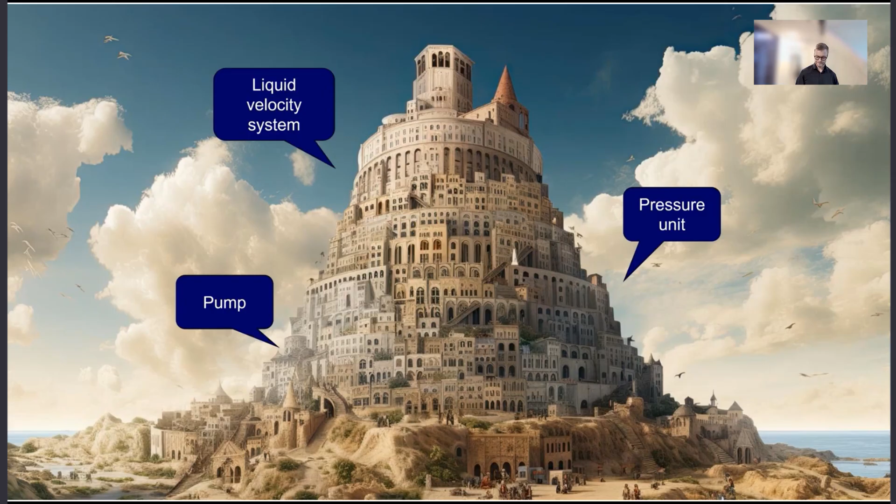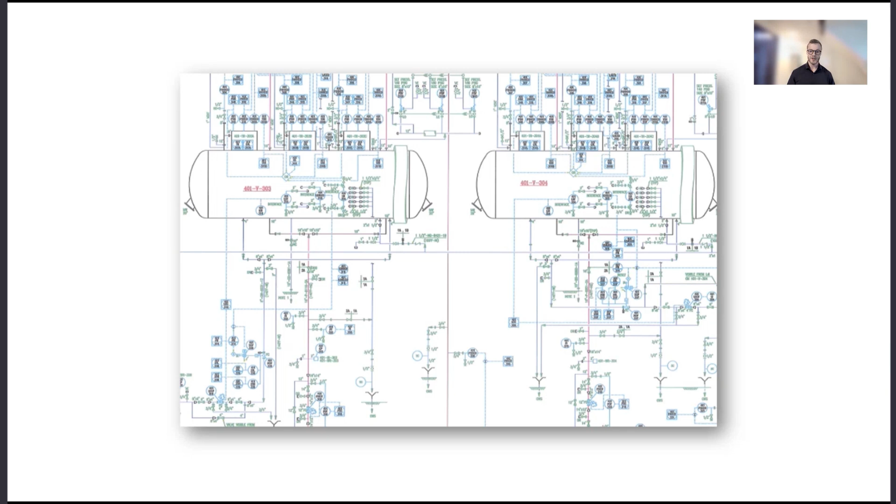This is what most systems look like. This isn't a design fair, it's real life. It's a maze of components, cables, sensors, pumps, valves, software modules, each with its own name, its own format, its own story. And when it breaks, you're left navigating this maze blindfolded. You spend hours trying to figure out what it is, where it came from, and who touched it last.

And this isn't actually the whole story. This is just the tip of the iceberg, so to speak. This is just one representation in our design, just one viewpoint. We know multiple people with multiple goals track the same items through multiple systems, each serving multiple functions, each with its own format, its own logic, its own language.

And when you need to make a decision fast, you're stuck stitching together fragments from 5 different platforms. Decisions made on half the story ends in surprises. It's not just a mess, it's actually dangerous.

That's why it's our mission here to create this common language. A common language the same way as they have it in the music industry, a way to communicate seamlessly between engineers.

AI models are only as good as the data they are fed. So if you feed them messy data, they will spit out messy data as well. Manual mapping is also something that we have seen, but it's slow, it's expensive, and it's error-prone. Vendor lock-in kills flexibility and innovation. So none of these really solve the root of the problem.

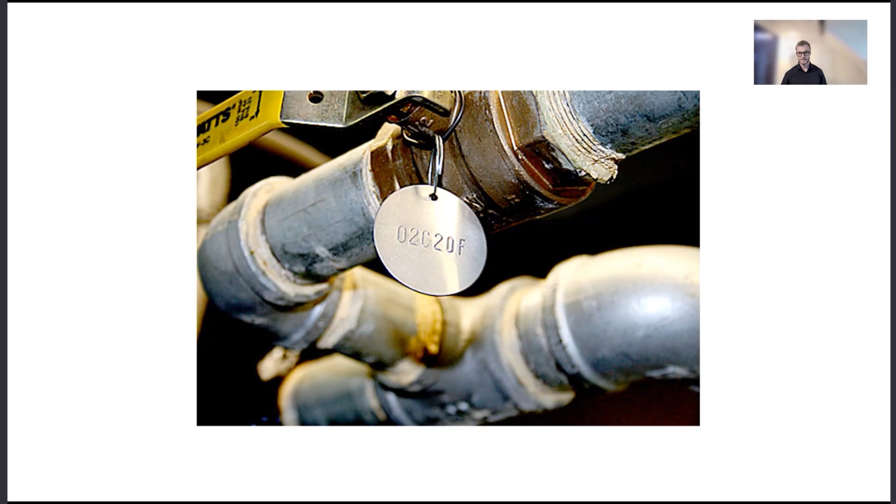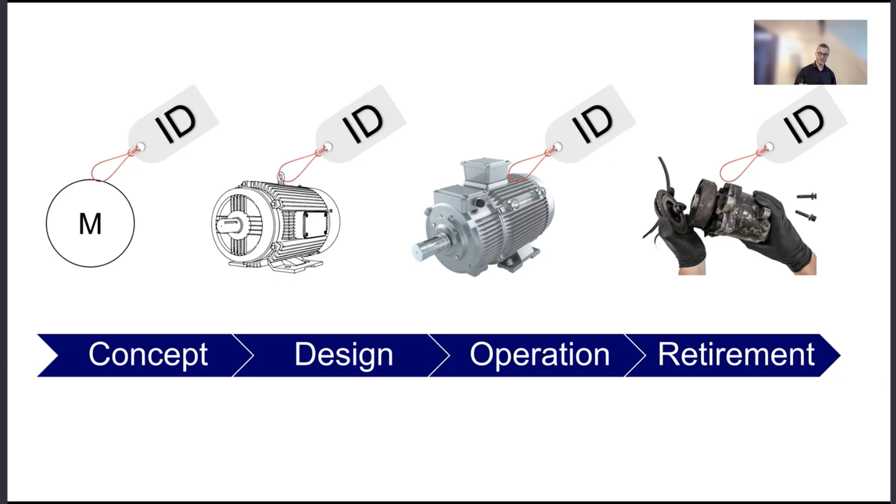Reference designations today take you from the concept all the way to retirement, from design to operation. We have made it our mission to create one tag, one truth, zero guesswork, one thread across the entire life cycle. You can actually say that reference designations for us are like the Esperanto of engineering. They let mechanical speak to electrical, software talk to hardware. They let humans talk to machines.

But how do we do it? But how do we know which tagging systems then to use? There are actually quite a few of them out there.

Pretty much all legacy systems are either hard to learn, very complex, or impossible to scale and make work for big data. If we try to arrange the possible solutions out there for reference designation systems by how hard they are to learn and how hard they are to scale for big complex data, taking some of the usual suspects, it turns out that they're pretty much either hard to learn, and also pretty hard to scale for big amounts of data.

But if we now try to see what we have done with 81346, we made it our mission to make something here which is both very easy to learn and very easy to scale.

So how does this work? In our group, we have stuck to some core principles. We want to keep a simple syntax that can handle unlimited complexity. We have made it our mission to introduce a proper classification framework with definitions, and we have also allowed multiple structures and viewpoints. Making something complicated is easy, but making something easy to approach, that is hard.

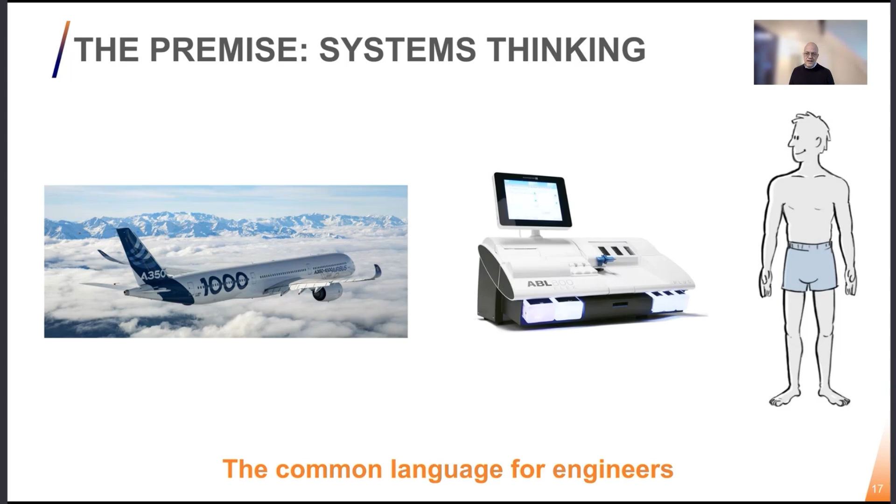Just for your own surprise, human beings are also considered to be systems. In fact, you can look them up - we officially have 11 systems. For example, we have a muscular system, skeletal system, cardiovascular system, nervous system, etc. I don't know if it's available in Finland, but at least in Denmark, when I go to the doctor, I'm pretty sure he has a skeletal system and a muscular system hanging on the wall. So I suspect when I get sick, he's not interested in me, but he's inspecting one of my systems.

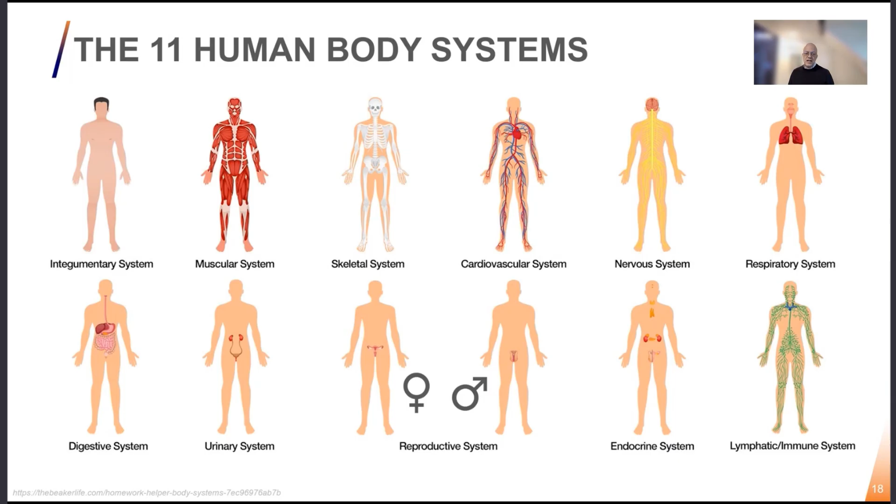Just think about it. A human being is extremely complicated and complex, and a way of organizing that complexity is to organize it into systems, as you see in front of you. So the premise for understanding systems, and understanding 81346, and understanding anything you do in your daily life, is considered to be a system.

When we have done so and accepted the fact that everything is a system—that's a belief we need to take—then we would like to model it. I need to spend a little time introducing what a model is about.

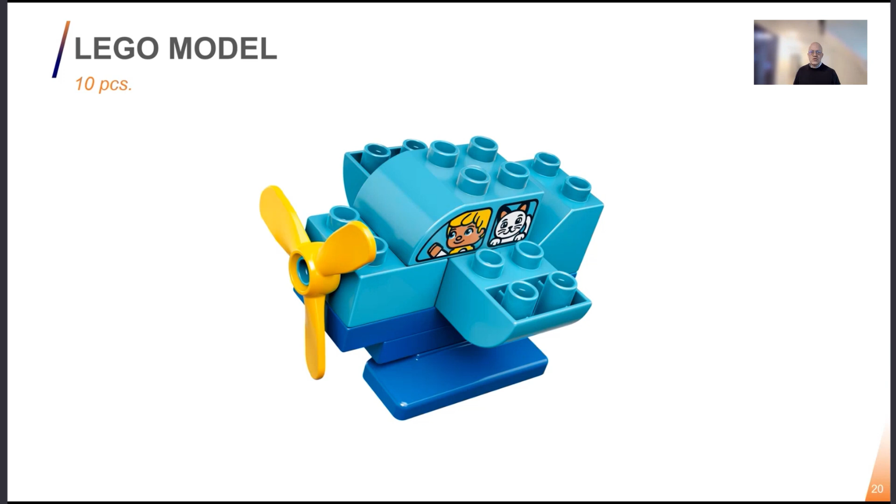So allow me to take something very simple, namely a Lego model. If I want to model an aircraft, I've used Lego Duplo and 10 pieces of Lego Duplo bricks to create a model of an aircraft. Yes, I know it's a baby model, yes I know it's simple, but no one can question that this is a model. So models are extremely useful.

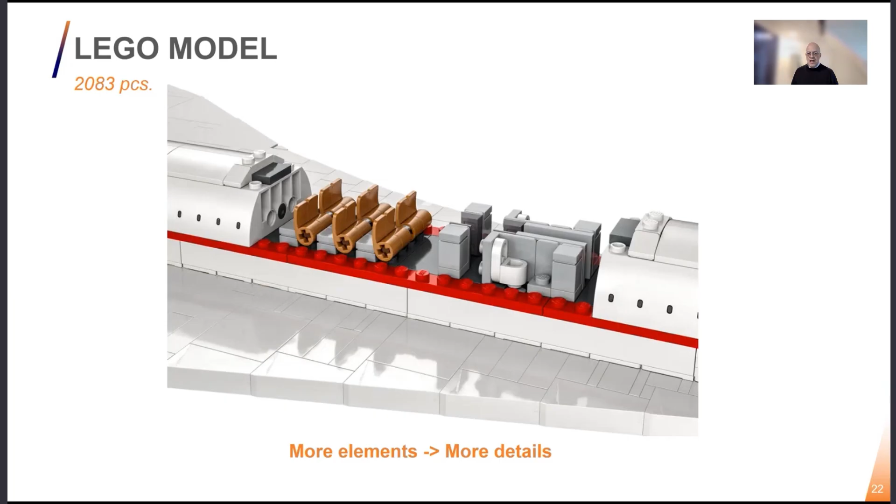And of course, if I want to model something more sophisticated, like the big Concorde, you can actually buy that as a Lego model toolkit. In this case you have 2,083 pieces—at least that's what's written on the box when I bought it. When you assemble it you get a nice piece of model like this one. It actually gets so detailed you can model seats and toilets inside. It's still a model, but it has the commonality that the more elements you add, the more details you get. I would like to repeat that when we talk about system modeling.

So if we combine modeling with system thinking, then we would like to introduce what 81346 is in fact about, namely creating a reference model.

And just to make sure we are not talking about something you don't know what is, I have made a little definition for you here. In the context of this presentation, a reference model is an informative representation of an object, person, or system for reference purposes. Now the little word 'reference' is something you have to remember, because we need to get back to it in a moment. That little word reference is the big difference of what 81346 actually offers you. So please remember the little word reference from now on.

So if we combine system thinking with reference and with model, what do we get then? Well first of all, the same rule applies: the more elements we get, the more details we can get, just like the big Lego thing.

Then we need a syntax. Philip mentioned it in his presentation before, but we need a syntax so we can point at somewhere in the model and know what we are talking about. And finally, of course, the model is not made with Lego bricks, but it's made with system bricks. And these system bricks are defined by the IEC 81346 standard.

That's the first secret we would like to share with you, also to the many new beginners: when you open 81346 and look into the definitions and terms, we use the word 'system' everywhere we can get away with it. System, system, system. We repeat it constantly, and we think about systems every day here in our company.

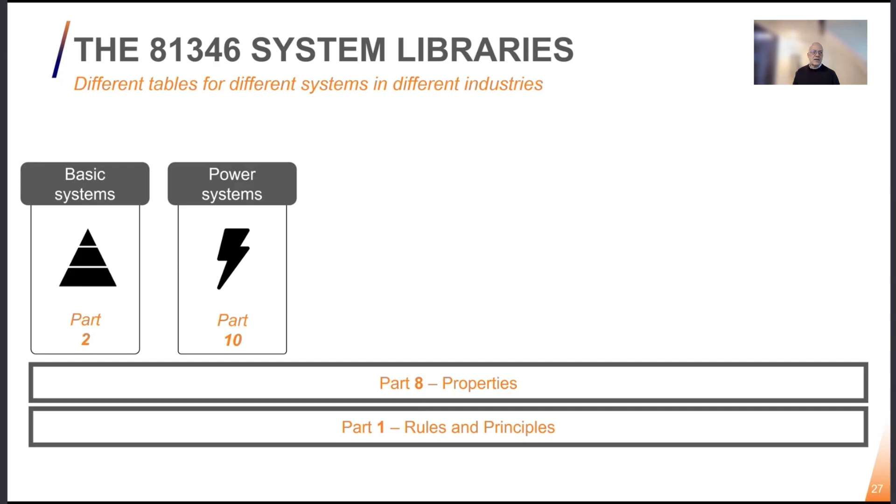Then we have a nice range of industry parts. We have Part 10, which is anything related to power systems, any kind of energy you want to produce, whether it's wind turbines, nuclear power, coal, or solar—same, it's all handled by Part 10. And we see a lot of energy companies transferring towards Part 10 nowadays.

Part 12 is about construction systems, when you build a house, and the latest news is we're going to expand it to be infrastructure as well, which means roads and tunnels and stuff like that.

Part 14 is about manufacturing systems, machinery that produces something, whether they produce milk or pack milk, or they produce cinnamon rolls, same story, or even produce aircraft. We use Part 14 for that.

The new Part 20 is about vehicle systems. It originates from the job we have done together with Airbus for a range of years now, but we have expanded the idea, so we don't talk about systems in an aircraft, but we talk about systems of vehicles, which means it fits for ships, it fits for cars and trucks, but also for aircrafts and helicopters and stuff like that.

And then we have a new boy in town, so to speak. We have something called system processes, which means when you perform a process, if you want to describe how to build a road, or if you want to perform or describe how to make a process of shifting a filter or mounting something, we have created a new Part 50, which is about the processes that you can organize as well.

So as you can see in front of you, the standard is growing, but the way that it's growing is that when you know how one part works, if you know how Part 2 works and Part 1 works together, when you get the idea, you can easily unlock the rest of them, just depending on what you want to do. And in daily life, we usually only work with Part 1, 2, and then we work, of course, with Part 8 in the sideline.

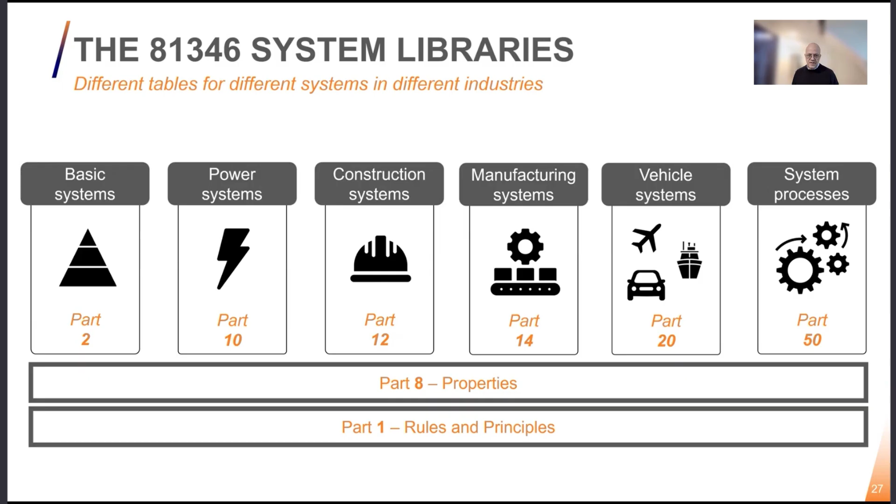Now, just to fly you in without getting too detailed about 81346, how it works. So in a nutshell, when we are asked by new beginners like half of you, how does it actually work? Well, first of all, the way to sort things that are complicated is that you need to break them down.

So you have a system which is organized in subsystems and subsystems and subsystems so on, which is what this little figure represents. And finally, we also have the triangle. The triangle is a ready-made repository of systems you can pick from. And that means it's just like a box of Lego, to be honest. You open the box of Lego, and there you've got all the elements you can build from, and then you simply just model it by making a system breakdown.

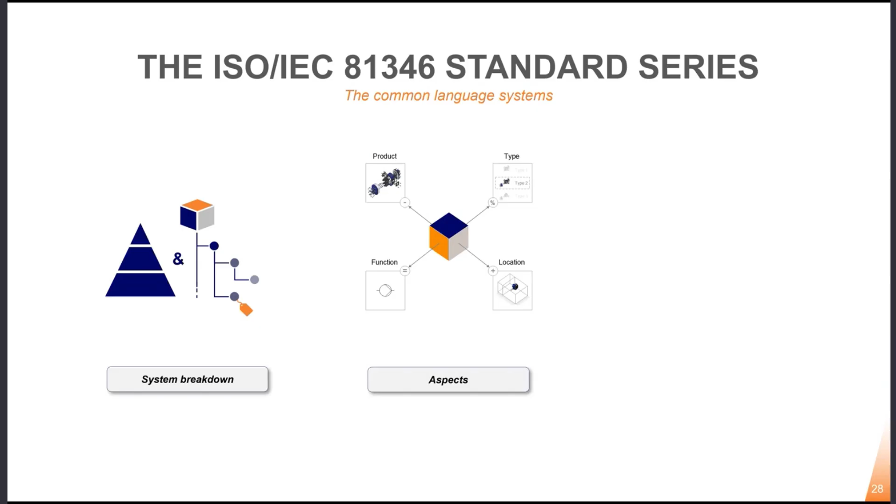The standard has a very important way of making clarity, and that it uses something called aspect thinking. Aspects basically just means that you sort things in different kinds of categories. The standard has 4, it actually has 5, but in this case, we show 4 different kinds of aspects. We have the original one where we focus on functionality, focus on locations, the variants called types, and we also have something called the product aspect, which is a way of modeling how things are physically made.

Finally, but not least, the standard has introduced lately something called relations technique. That means that when you have organized these different kinds of views, then you can start to say which function can I find in what product and where's the product installed, just for example, like this. And that is very useful because when you put all this together, then you can create the famous reference model that is in fact what 81346 is about.

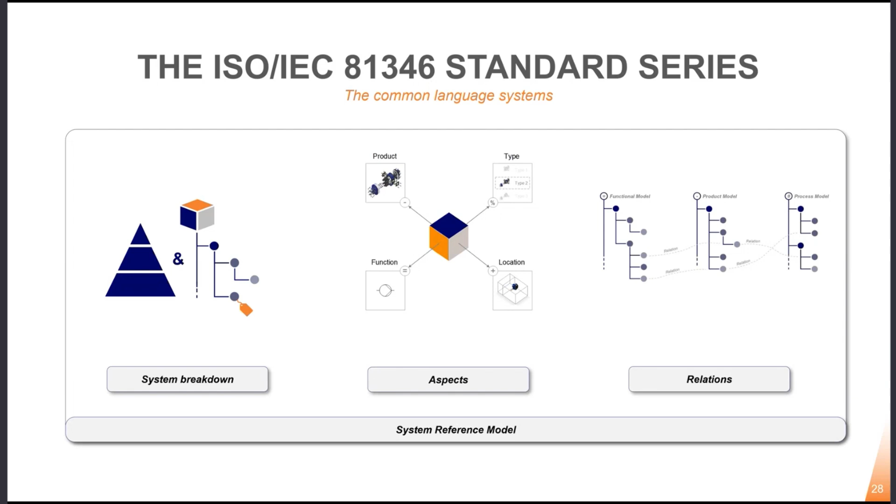So 3 things in a nutshell: system breakdown with a repository, aspect thinking, and how things relate to each other. We know by heart that if you have not done this before, it will take you less than a day to learn the technique, especially if you download some of our free examples. It will make life more easy for you.

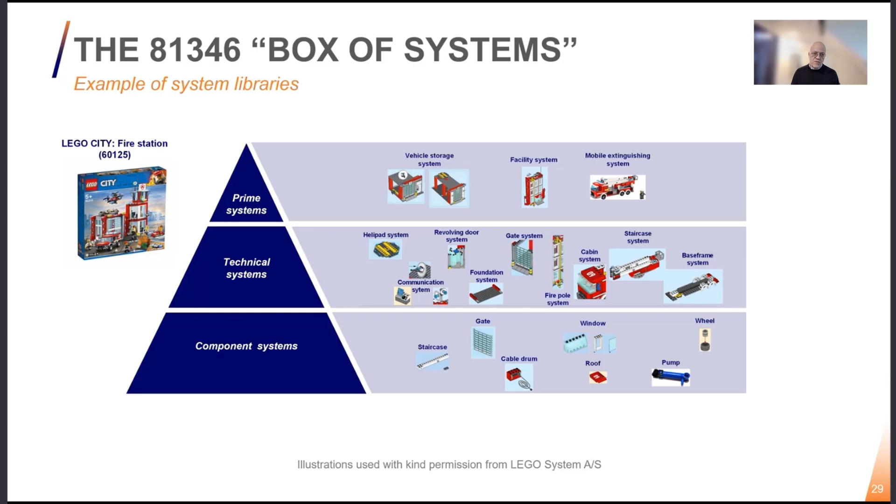If we take this box of Lego and unwrap it into system thinking, in prime systems you'll find stuff like vehicle storage systems, facility system, mobile extinguishing system. In technical systems, you'll find predefined stuff like revolving door, gate system, cabin system, staircase, etc. You can read for yourself. At the bottom, you'll find all the bits and pieces that things are made of: windows, doors, cables, pumps, etc. This is a repository that you pick from. So it's a box of Lego with 3 boxes of Lego inside, and with this one in hand, you can model anything.

To be a little more realistic, if we go into part 10, in daily life we call it RDS-PS, but it's part 10. Let me show you an example of a wind turbine. This is a project we did together with Vestas. Same philosophy: prime system, technical systems, and component systems.

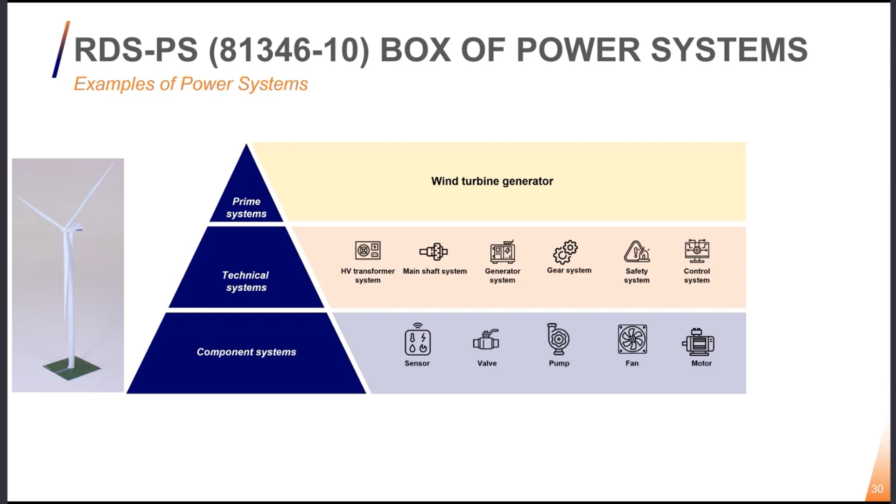When you've created the model, you need to refer to it. For that purpose, we need something called a syntax. The syntax is something we're all familiar with, but let me show you a practical example: my email address. This is in fact the syntax we use every day. It has a receiver, a separator sign, and a domain. That's pretty obvious, so it's a syntax we're all used to.

And likewise, 81346 also has a syntax. The syntax goes: we have a prefix, we have a class name, and we have a number.

If you look at the prefix, we have the 4 aspects: functional aspect, product aspect, location aspect, and type aspect. For historical reasons, it originates from 1971 and 74 I think, we use equal, minus, plus, and a percentage sign, and that's just a way of communicating what aspect I'm talking about.

Regarding the class code, we've decided to make an easy, recognizable way of navigating prime systems, technical systems, and component systems. Prime system has a 1-letter code, technical systems has a 2-letter code, and component systems has a 3-letter code. The only difficult thing is that these letter codes are not related, so it's just like looking at 3 different kinds of color codes. They don't have any specific relation to each other. It's just 1, 2, 3, and that's it.

The number is super easy, it's just 1, 2, 3, 4, 5, 6, 7. Sometimes we see numbers given a specific meaning, like 100 series means this and 200 series means that. To be honest, we never recommend doing that because it's very difficult to maintain. It's just, sorry to say, a stupid number.

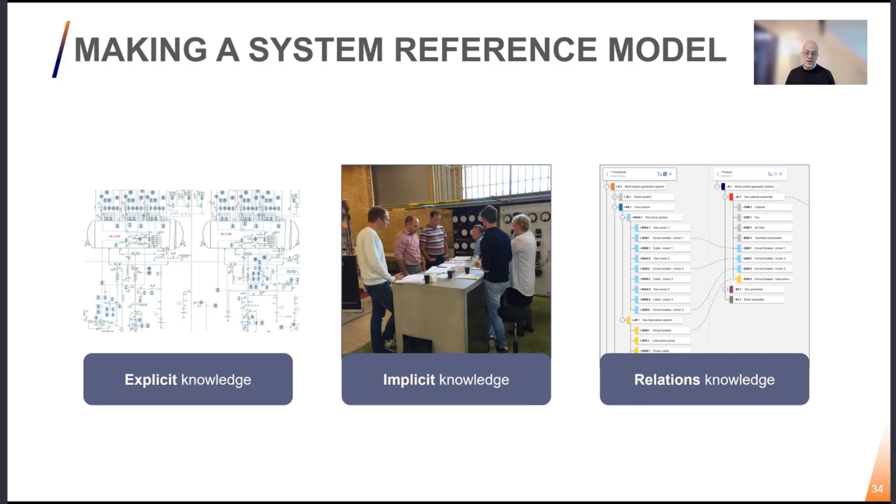So in the picture to the right, you see two different kinds of breakdowns, but you can also see there are some small lines in between. And those lines are, in fact, how things relate to each other, the dependencies you have internally. That's an official way of expressing dependencies, relating things to each other.

That means if you pair explicit knowledge with implicit knowledge with relation knowledge, following 81346, then you have an 81346 reference model. And I'm still surprised, after all these years working with it, how powerful it is to unlock the knowledge you have in organizations by making these kinds of models. It's a very nice way of working. It takes time, but it's definitely worth the effort.

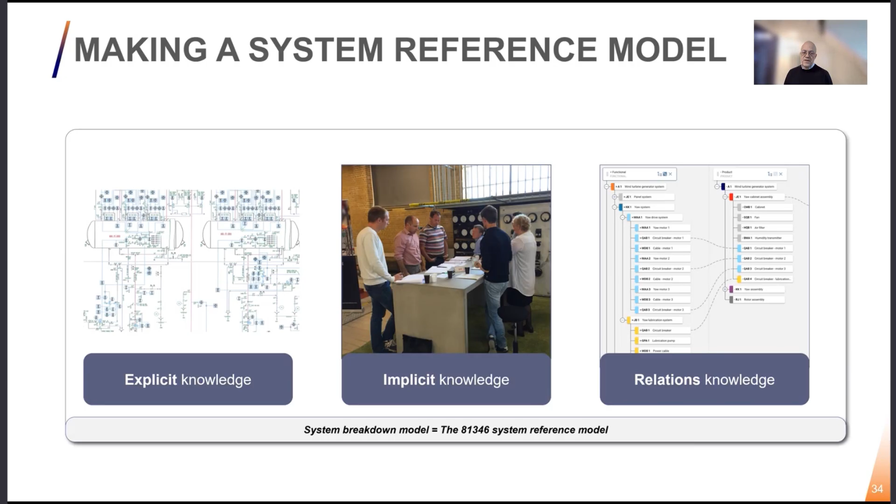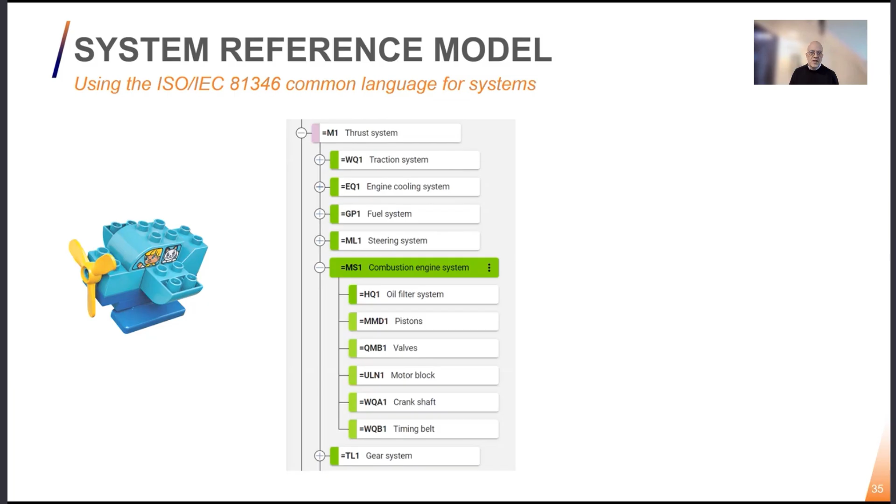Now let me show you in reality how it looks like. So if we take our little baby model from before and focus on the propulsion system, the thrust system, then it will look like this. If we imagine that we made this little plane, a system breakdown could look like this.

The thrust system is made out of traction system, engine cooling system, fuel system, steering system, and combustion engine system. And the combustion engine system is made of another technical system, an oil filter system, pistons, and stuff like that. And as you can see here, I can combine the different kinds of technical systems and component systems and put them into each other the way I like.

So there's no limit. There's not just 3 levels. There's no limit to the work breakdowns you can make.

The trick, and what a lot of people actually don't see, is that the reference designation is an address. So if I write equal M1, that means I'm referring to the thrust system. If I write equal M1, equal MS1, I'm referring to the combustion engine system. And if I write equal M1, equal MS1, ULN1, it's more or less difficult to say.

And I know up front it's difficult to handle. You're not supposed to read the codes by heart, we have tools for that. In this case, I'm pointing at the motor block. So that is what the common language is about.

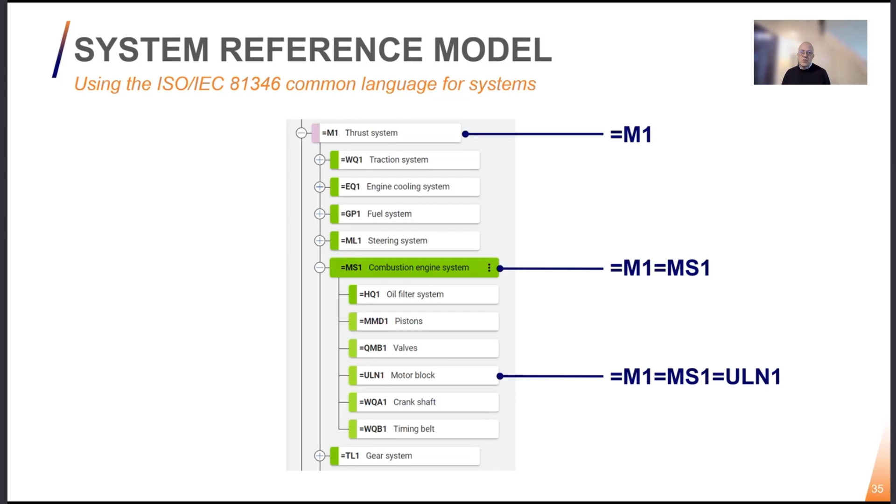The language you speak, the understanding, is systems, but the way we use 81346 is to address a certain point in the reference model.

And that means if we have 2 silos, let's assume we have a mechanical engineering department and an electrical engineering department. As you know, these two different kinds of silos speak different languages, and that's okay. The price you have to pay is that we need to make sure they talk about the same thing.

And the way that is done is very simple. As long as they refer to the same thing in the reference model and use the coding technique from 81346, they are talking about the same thing. This is what 81346 is about in a nutshell.

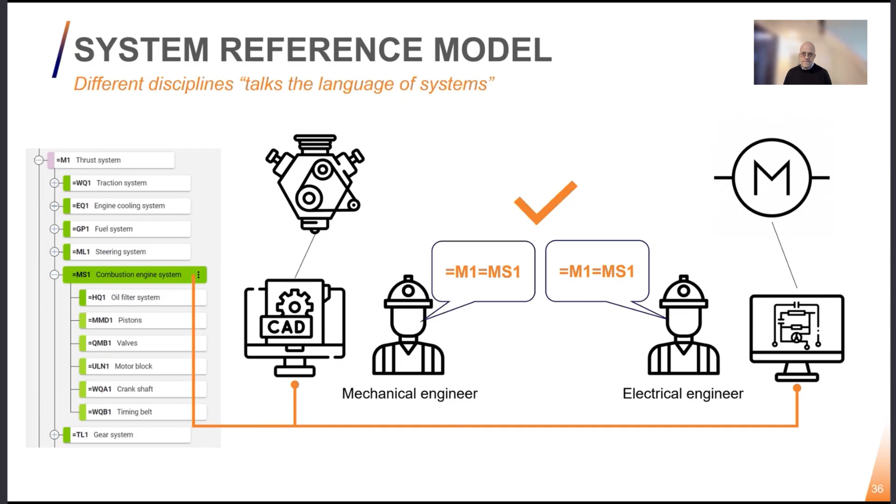Now, as I said in the beginning, I've been working with 81346 for 30 years, believe it or not, and it has been an integrated part of my life, and I still love it a lot. But I lost track, so I had to ask AI, what can I actually use 81346 for? I mean, Jesus Christ, I can use it for a lot.

So I had to ask AI specifically, please tell me what 81346 offers, and I got this funny response. It said, well, first of all, you get reference designations, which are structured identifiers for systems, components, and assets. That's very nice, thank you very much.

That's in fact what 81346 offers. Then it gives you a system architecture model, a clear hierarchical representation of complex systems. I mean, I want a thing like that too.

Then this tricky thing, cross-domain consistency or unified naming and classification across electrical, mechanical, software, and civil domains, in daily life is called a common language.

Now, the fourth reply might surprise you a little bit because it actually came from my AI, but it says it's a digital twin enabling, a foundational structure for interoperable digital representations. I was surprised and happy, but also totally agreed with the response from AI in this respect.

And finally, but not least, improved lifecycle management, because as Philip was saying in the beginning, the whole idea is that 81346 is a lifecycle stable thing you can refer to. So even AI seems to agree with us. That's very nice indeed.

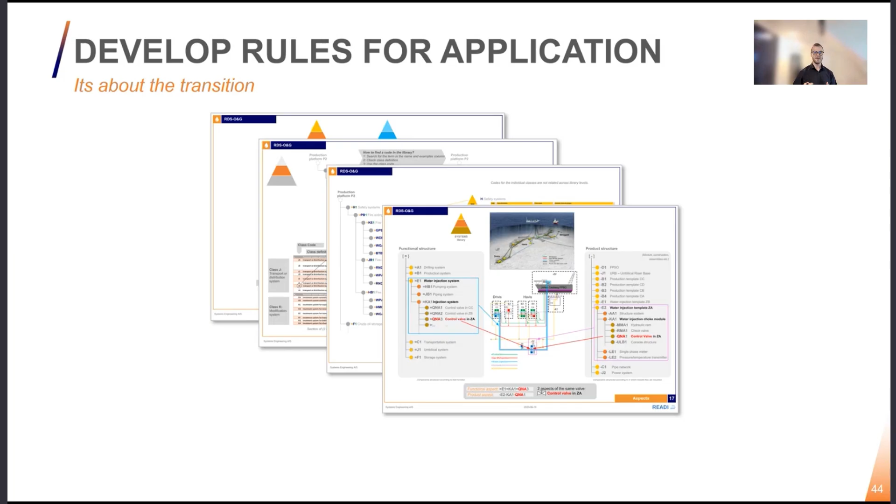It's much easier to show how things are done instead of describing how things are done. Of course the descriptions and the rules are also relevant, but you are much more inclined to get people on board when you have nice visual examples.

And that's the next thing. Henrik also showed you a quite complex diagram with a lot of explicit knowledge. We like to take those diagrams and really condense them into system thinking. That means any kind of complicated diagram out there, for example PFDs, P&IDs, or even electrical diagrams - we've made it our mission that we can systemize them.

We can designate the areas, which functions we're speaking about. We can color code them. And suddenly these quite complex technical diagrams get much more visual and much easier to explain to people. The nice thing is that whatever we have on the visual diagrams corresponds one-to-one with the system architecture model that we're also building, based on the same 81346 principles.

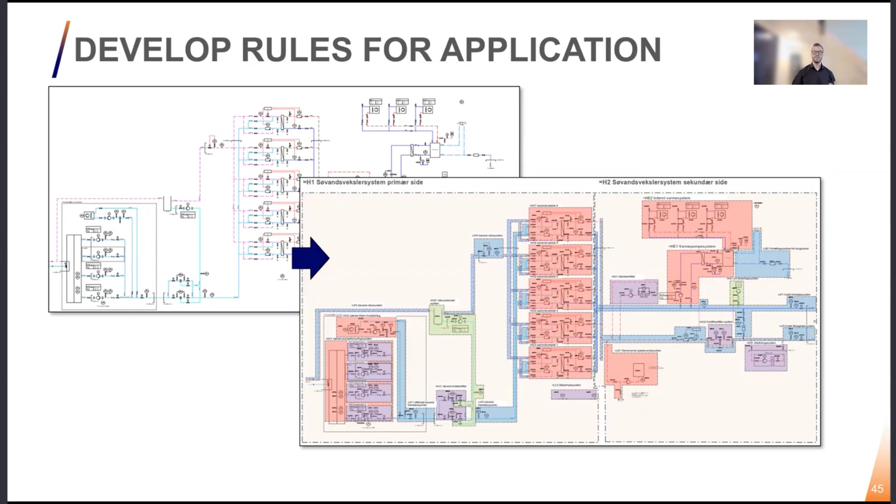With these nice visual examples in hand, you are much more inclined to get people on board, because you can describe and show what we're actually doing.

One of the quite important things is that we need to engage our stakeholders. Here I could ask you together with all of you, have you actually considered in your organization who are your main key stakeholders? And also, who should you involve and on which stage? Successful implementation is about keeping the information flow going and listening to the feedback.

So here are some of the stakeholders that we normally engage with when we go on to clients. We make sure that we speak to operation and maintenance, because these are the technical people who are going to own and read the reference designations out there in the field. Engineering and technical teams, who are sitting maybe more on the design point of view quite early on, are also adopting a reference designation system to keep track of the design and the components throughout the life cycle. So these are some of the people to have at the back of your mind.

And the last thing here, which we really want to underline, is that we want to give the ownership of the RDS system to an RDS owner. So we designate an RDS owner within the organization, who is like the governor of the RDS manual, who knows about the RDS systems and knows how to expand upon the different kinds of aspects and all the rules that 81346 gives to the different kinds of companies. Without an RDS owner, the rules and examples can point to all kinds of different directions. But if you have the ownership, then you know who to go to, to ask more questions or to elaborate more on the system architecture.

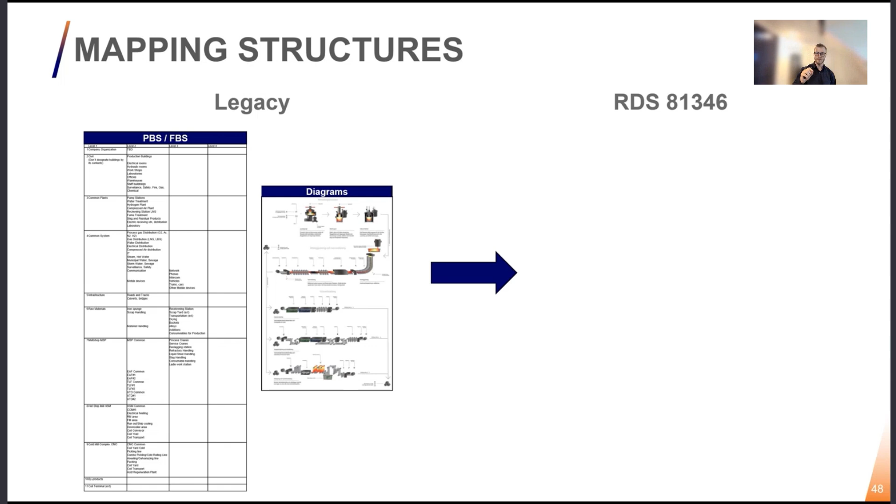The question that we often get, and why this also might seem overwhelming, is that people already have a legacy system out there. They have some sort of RDS system which has worked quite well for some time, but isn't really suitable for a more modern age, so to speak. We want to emphasize that you keep your old documentation, you keep the old system, but you map to the relevant areas in the new system.

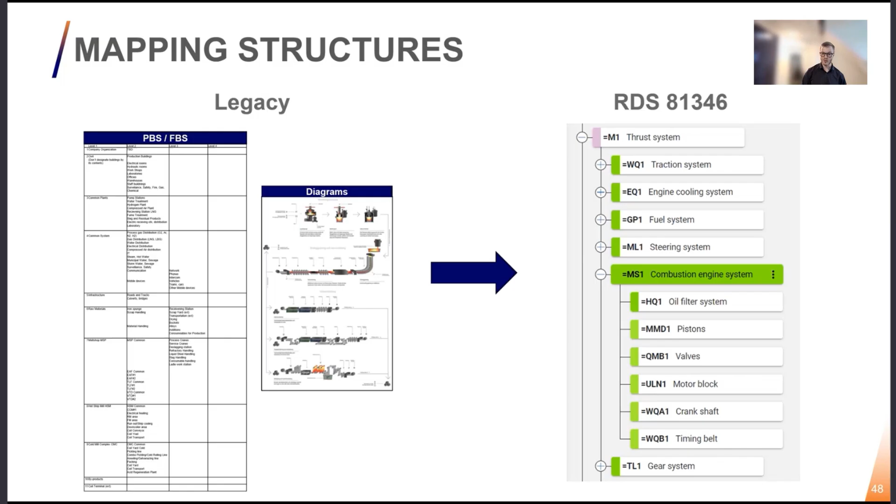This will, for the most part, be a digital transformation, and this means you don't have to go into the physical world, look into all your current equipment and start to retag all the items, all the pumps, all the valves, and so on. No - again, assess which equipment we need to put into the new digital model, and only designate things into the digital world. You don't have to designate the physical stuff with the new tags. You just need to make the mapping between these two different languages.

So, to summarize here, you need to keep a few things in mind - four things here. Keep the scope tight. One system or asset class is enough to surface most issues. This isn't about solving everything at once. It's about revealing the patterns, the edge cases, and the naming conflicts that matter. Start small, but go deep.

Then you need to visualize the result for your colleagues and your managers. Use diagrams and designation hierarchies to make outcomes tangible. Don't just talk about structure - show the structure. When stakeholders see how systems relate, how functions map, and how identities align, they will engage with you. Visual clarity builds consensus.

Also, document rigorously. Treat the pilot as a proof of concept. Capture what worked, what didn't, and why. This isn't just a test, it's the foundation for scalability in the future. Clear evidence builds trust across departments and disciplines.

And lastly, engage with your operators and your stakeholders early. Their feedback often reveals practical gaps that engineers overlook. They know what's used, what's ignored, and what breaks. Bring them in before the structure is locked. Their insight makes the systems useful, not just compliant. So these are our recommendations for things to keep in mind when you want to expand upon the RDS system and really implement it in your organization.